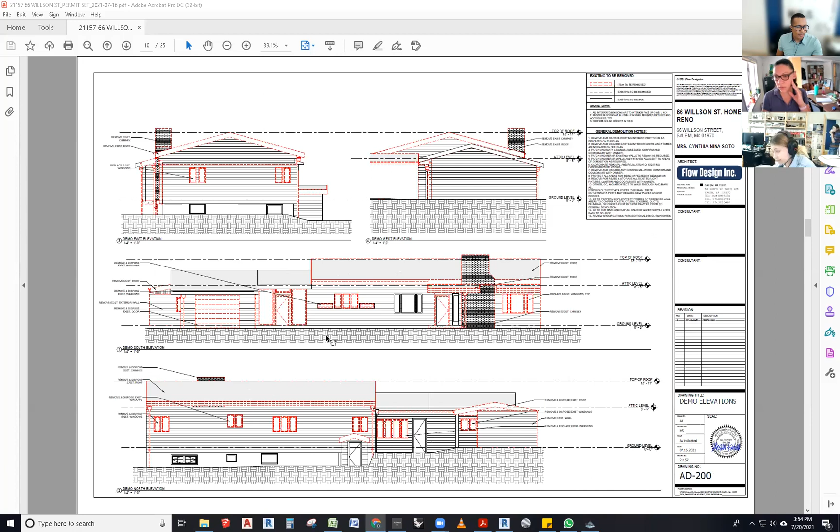All right. So the first thing I want to tell you is, when we try to frame this, we try to figure out a logical way of framing it. All of these options that they mentioned are great for different reasons and different scenarios. So let's start with the clear span I-joist.

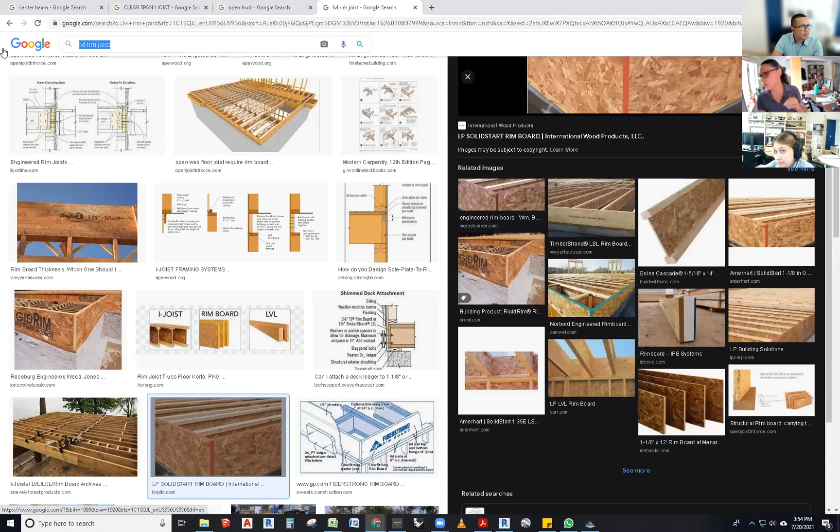So the I-joist, if you don't know what they look like, they look like an I, but like that, yes, in the middle. These ones are these pieces. Let me see what the best picture is. Oh, the one that says Boise Cascade. Is that not an I-joist?

Oh, okay, I-joist. So they are engineered members that can span all the way from one side of the building to the other side of the building. Most of the time, for residential purposes, they're perfect because there's no columns, there's no beams. So this would actually be your floor assembly, it will be made out of this.

Now, what's the thing? They tend to get very deep sometimes. I think they go from 9 and 7/8 to like 20 something inches, right? And it all depends on how far it goes. So they are becoming much more feasible nowadays because the cost of lumber is so crazy anyway. So people use it. You have a lot of space to put stuff inside the floors. For new construction, I would recommend it.

For a building that we're trying to add a floor to, it would limit your ceiling height a little bit, or maybe not. It wouldn't, but it would make the stair longer because you got to go up more, right? They're deep. Gotcha. Okay. So they're great for that.

The open truss, it's simply exactly what they say. What they said for the ceiling, it will be for the floor, for your second floor. For the open truss, it's a truss like this, a system of trusses. That will be your roof, and you buy them. I tell you what the sizes need to be, you buy them, and they come and they're done. They don't have to do a lot of cutting and messing with it.

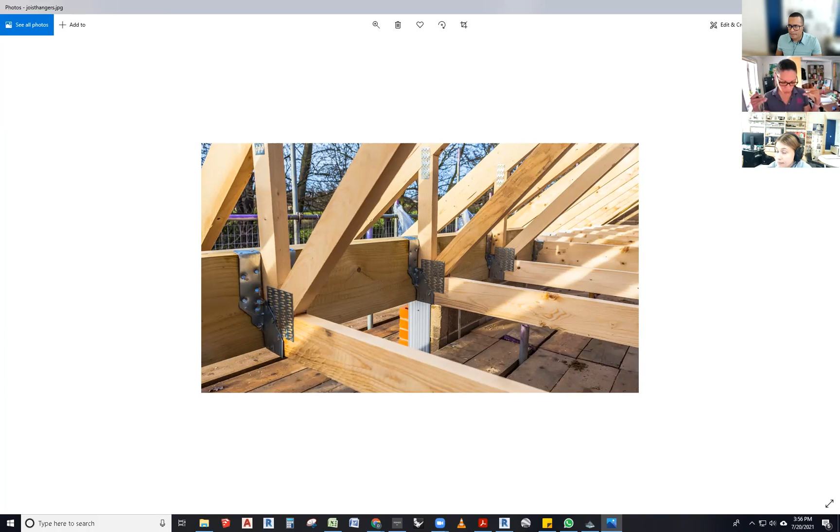Gotcha. So that open truss has nothing to do with the actual second floor, just with the roof line, correct? Exactly. Has only to do with the roof. Gotcha. And it's a member again. I tell him what the sizes are. They'll probably have to make it. And then that's it. With the span, you're done. You don't have to mess with anything. They don't have any beams. They don't have anything.

So going back to your building, so you know what I'm talking about on your property. So basically, this entire roof piece structurally will be one element, and you're done. Like that's it. So like this piece that you see with insulation here, by the way, which we actually just put insulation here.

But this is again, I don't want to... Yeah, no, that's fine. Yeah, no, I know you guys are still working on it.

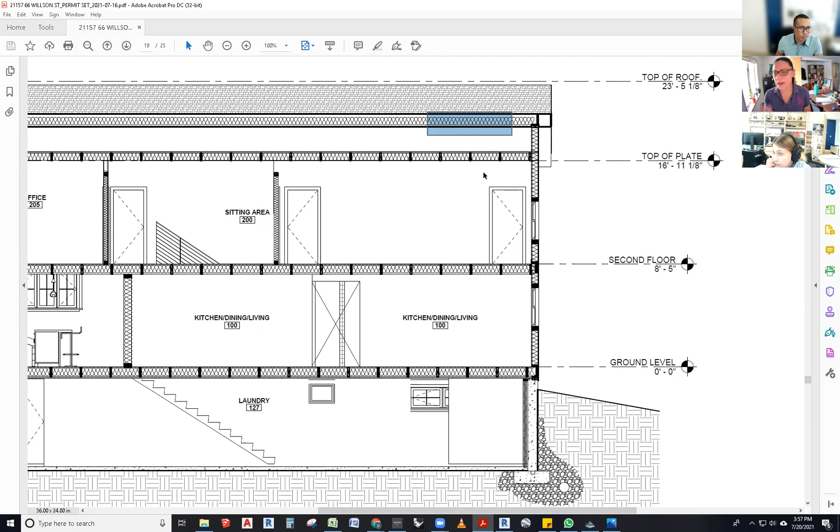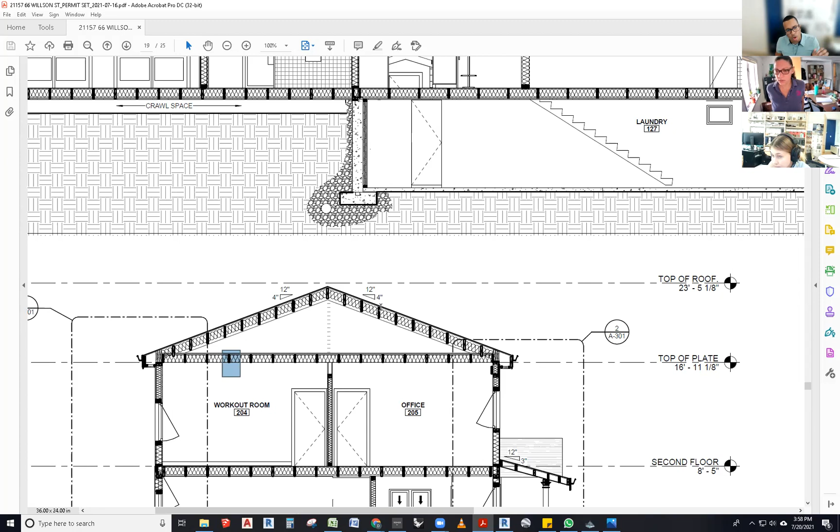Right, exactly. So this whole thing right here will come as one structure. Now, we have a 2x member that goes from here to there that will be sitting on some of these walls, and then another member. That's another 2x, different members at 16 inches on center, all through your entire ceiling. And so that's that thing.

The other option that they were talking about, it will be more feasible for this. It will be the I-joist that will go all the way from this side to this side and done. They don't need any columns. But isn't that going to limit my ceiling height on the second floor? It wouldn't necessarily limit your ceiling height, to be honest. It actually just increases your floor height, like the stairs, because we probably maintain the same ceiling height. We just go up with it.

So it means that your stair will have to go higher and it will have to be longer by whichever amount of depth we need. I can quickly try to tell you how deep they would need to be. I think the cost comparison, they get pricey. They are pricey. Maybe you don't do them at 16 inches on center, you might do it at 24 inches on center, so it will save you a member. But they cost more than a 2x8 or 2x10.

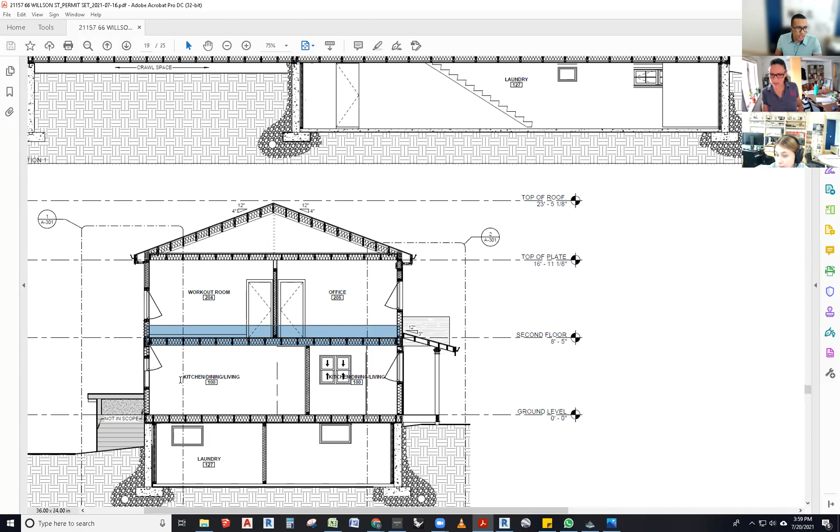So then the other thing that he mentioned was an LVL rim joist. What is that? So the LVL rim joist that he's talking about is like grabbing an LVL on the edge all around your entire building. Now I've never seen that term being used like that. So I'm assuming he means an LVL will be all around the perimeter of your building, and then you're going to attach your joists to them. I wouldn't do that. I don't know why you would want to do that.

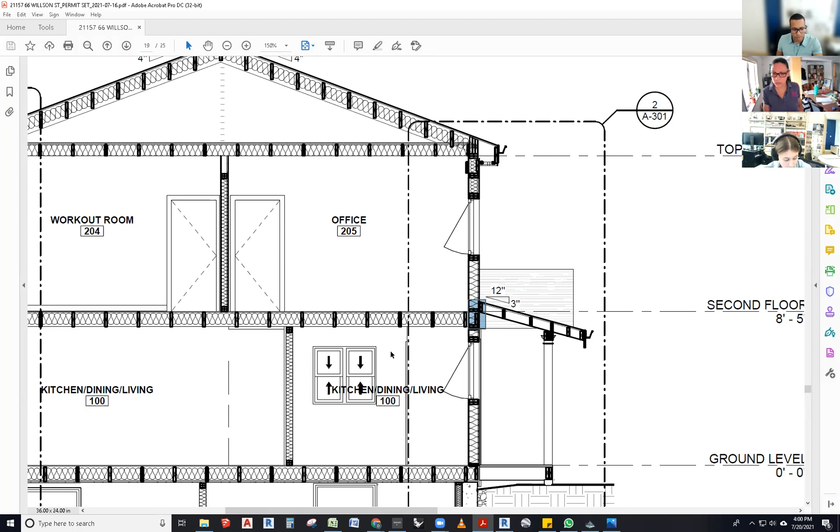You do that sometimes when you want to gain some height on your ceiling, but you still will have to do what we did. Like these members right here will still have to be supported by a beam somehow. So I don't know why you would do that. So we got the truss, the I-joist, and the LVL rim joist. Yeah, so that's what the rim joist is.

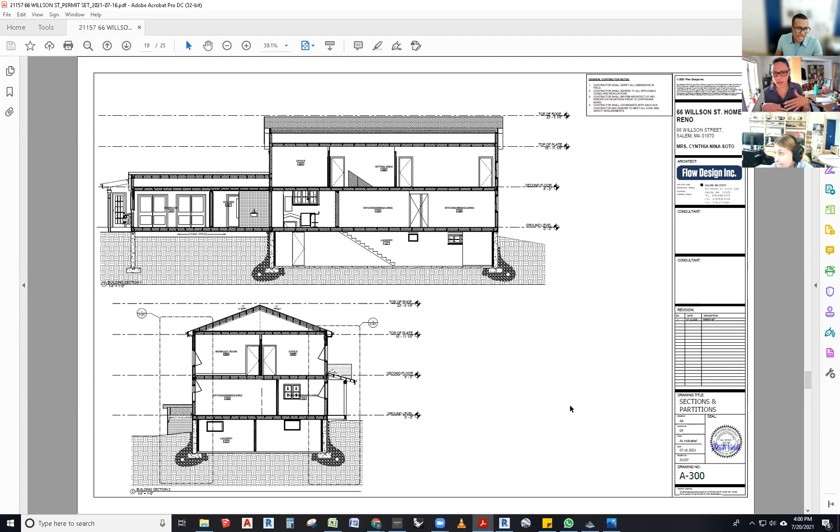The LVL will go all around the whole thing, but it's only to gain height, so the whole floor sits on top of that. But you still need joists to support the middle, or else it's just going to come in. Exactly. So that wouldn't save you anything. So then what is it that we are doing? We're doing a center beam, right?

Exactly. So we have a beam that will go through the middle, some posts that will go inside the walls, and hopefully they land within walls and locations where you wouldn't see them, and they still have to be supported by whatever structure you already have below. There may be some reinforcement that needs to be done to the columns that you already have, or new columns that need to be put.

Ideally, we just reinforce the ones that you have. I know you do want to get rid of some in the future, so we have to mitigate that part. But we're basically doing conventional framing for retrofitting a building. The I-joists, those are things that I considered early on.

Like, okay, we're building this new, and I have seen them done for that first floor over the basement. They're all I-joists, because all your mechanical goes right through it. They can actually cut holes through it, and it's great. Makes sense, yeah. But I-joists in the ceiling where you're going to pour concrete, so you can go lower. That's all good. So that's where I have seen them.

Okay, so my answer to your contractor is: just do whatever you tell him to do. Yeah, but he has wiggle room. He could quote it whichever way he wants, to be honest. Like what I did here, he could say, you know what, I'm gonna get a truss for the roof, are you guys okay with it? Well, would it save me anything on my roof framing? If it does, then yes, just remember I'm going to insulate the roof itself. Nothing changes in there.

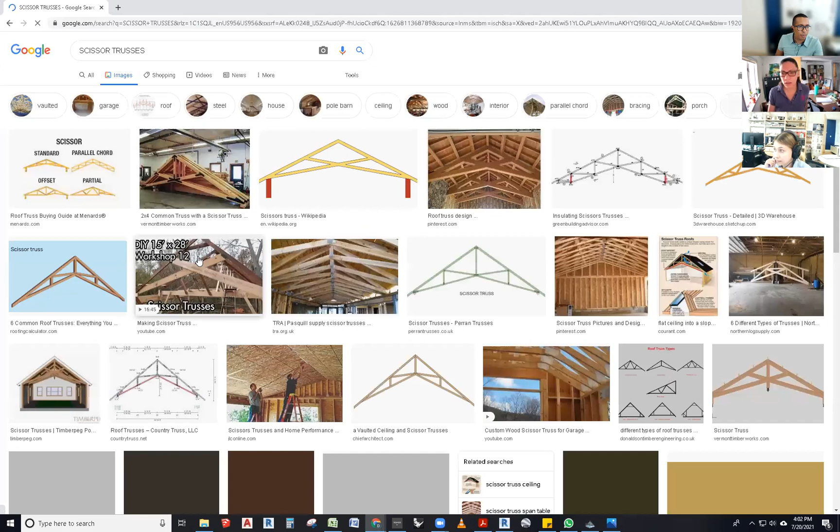Okay, sometimes the issue is also if you want to use that roof space for whatever. The truss he's saying is open, so it wouldn't have the zigzags that you see inside the truss, it's an open one. There are other ones called scissor trusses. Actually, this wouldn't be an open one, but this is a scissor truss, and it's good when people are doing cathedral ceilings. Yeah, no, we're not doing that. Okay, but you have conventional.

I also hate that you have your caps lock on. Only psychopaths do that. We draft in architecture with caps on. Really? Have you seen all of our drawings? You don't see lowercase at all. No, I see that, but that's a drawing. I'm like, that's just weird. I never knew that. I'm gonna make that a trivia question.

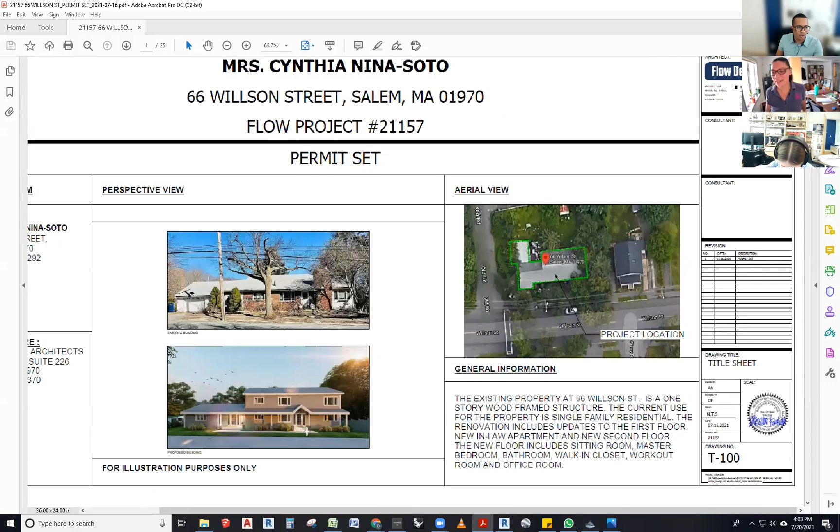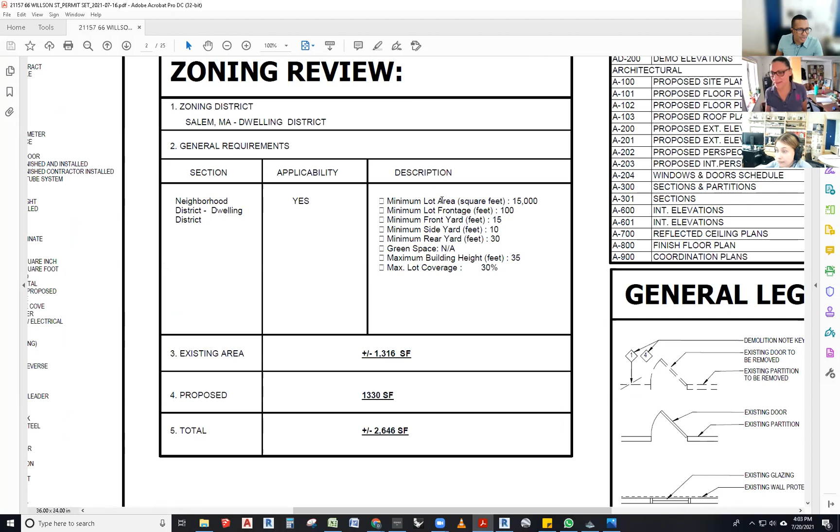Here you go. All caps for all architectural drawings. That's a must. You see it even on our cover page, boom. Because it is much more legible than regular writing, especially when they photocopy. In architectural school, that's the first class: hand lettering and hand drawing, all caps. You may see some things that aren't, but this is how they do it on the code, the building inspectors. So it should all be all caps.

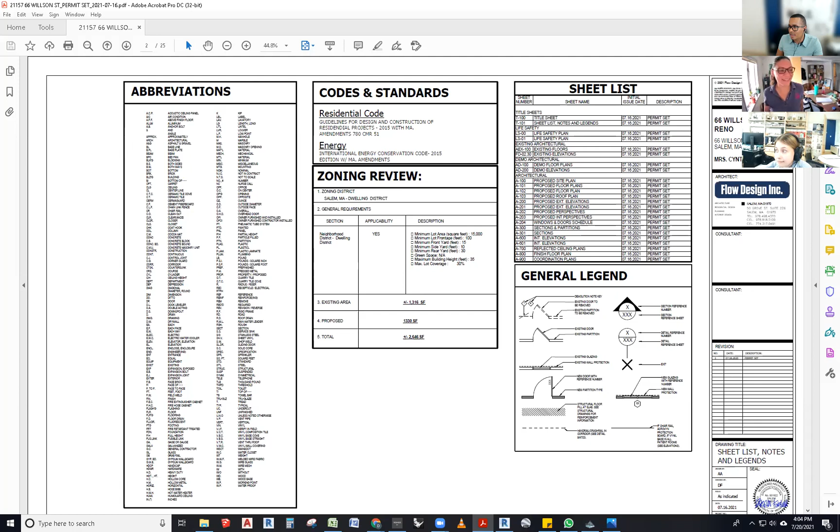Sometimes I send messages to people and I get in trouble because they think I'm yelling. I'm like, I'm sorry, I'm an architect. But there's quick buttons, Shift F3 changes it. So that's easy.

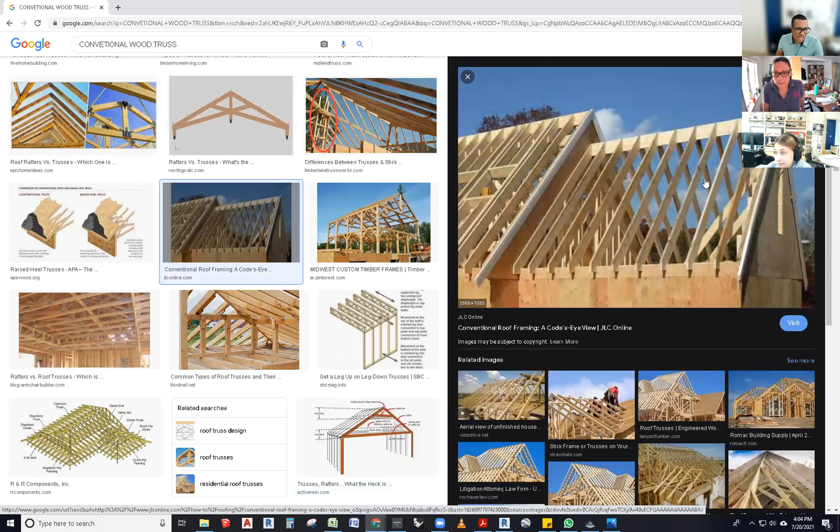So these are your truss options. I think the one that he's saying is like this, open. I guess it's almost like a collar tie. But he's saying it's one option, that's all. This is what we're doing for conventional framing right here. Gotcha. To me, I would think that is cheaper than doing a truss. Well, you've got to think less about cheap versus expensive.

There are only two ways that you save money. You either save money on labor or on the material. The thing is, labor is much more expensive than material all day long. So if this truss comes in, they don't have to be cutting this lumber piece by piece and attaching piece by piece. That's true. They actually teach us this in architecture school for the exams.

What would you suggest to your client in Alaska where there's a shortage of labor? They do all these crazy scenarios. There's not much labor, the weather is horrible, so they have a very small window of opportunity to build before they get a storm. Well, pre-manufactured: get it at a warehouse, ship it that same day, assemble it that same day, you're roofed that same day, done. I would recommend that one. But if it's in a locality where labor is abundant and cheap, have the guys have fun in the middle of July on the roof, sweating.

Done, right? Yeah, that's it. It's all good. They need it. So if he or whomever we end up hiring, once you stamp your permit set, would they then be able to say, oh, we're actually not gonna do this roof line, we're gonna do trusses? Like, how restrictive is that?

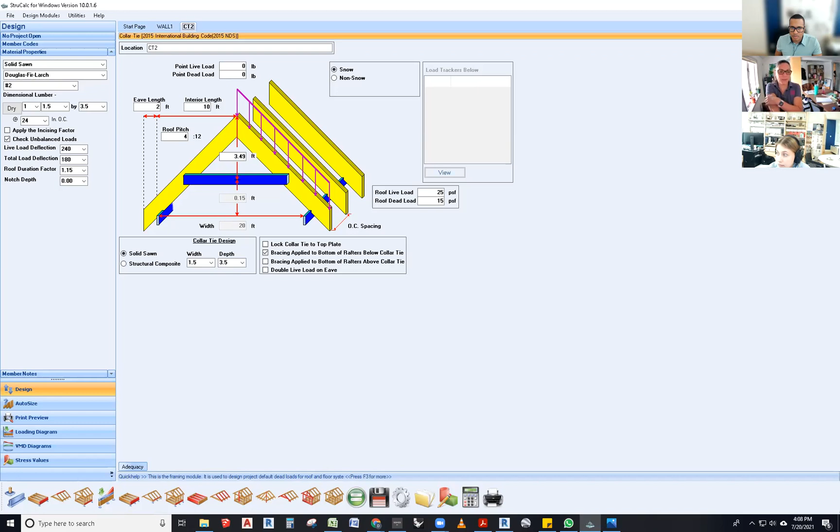Because at the end, I'm not even trying to protect the contract. I'm trying to protect you. I don't want this thing to fall. Correct. So I would check it out. It would be like a minute checking. All good. Right, it's the same thing as me writing an offer for a client: wait, let me just run my market analysis, let me make sure you're not overpaying. Two seconds. Good to go. Exactly. You go that little extra mile that doesn't cost a whole lot. I do this for every client.

Of course, your preferred client. Yeah, and she was learning at the same time. So it's mandatory learning for her right now too. So those are the things.

I must say, I am terribly sorry that you got me, because I am not only a realtor, but I'm also a flipper. So I am that 1% that takes a look at the plans and is like, I need to verify that measurement. Let me double check that. That is me. You're not gonna get very many clients like me. We've had three, actually four. I know them by names, last names, and addresses. It's not to be difficult. That's just the world that I'm in, right?

Because I've done so many flips, I know to look at and ask certain questions that a regular consumer typically would not ask, right? But at the same time, a regular consumer would take the plans and be like, yes, let's put a window there.

Meanwhile, I'm looking at the map, at the plans, and I'm like, wait, that seems like a supporting beam right there. We can't cut into that. You know what I mean? Like, so don't get scared.

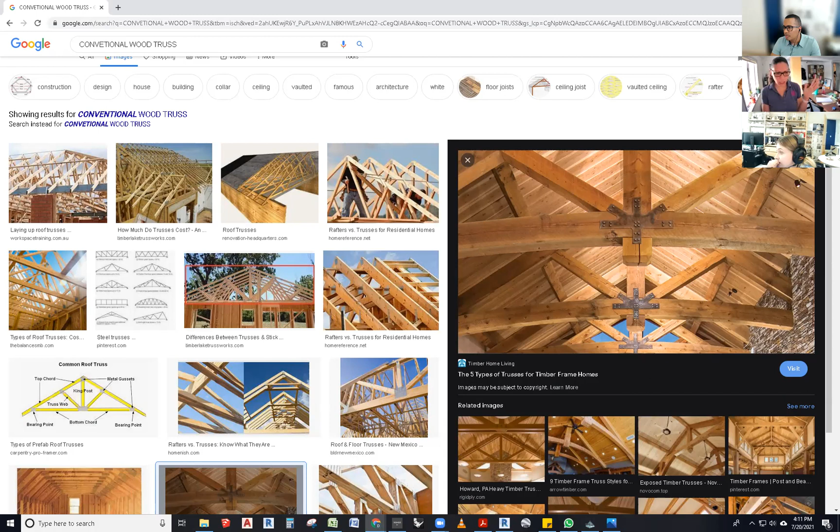The other question that just popped in my head. We're building a second floor. Do I need a structural engineer? No, we're doing it. So our drawings right here, this is exactly what we're doing. We're engineering what you need to do to make this thing work. So all of these members, like we're calling 2x12s, we're calling

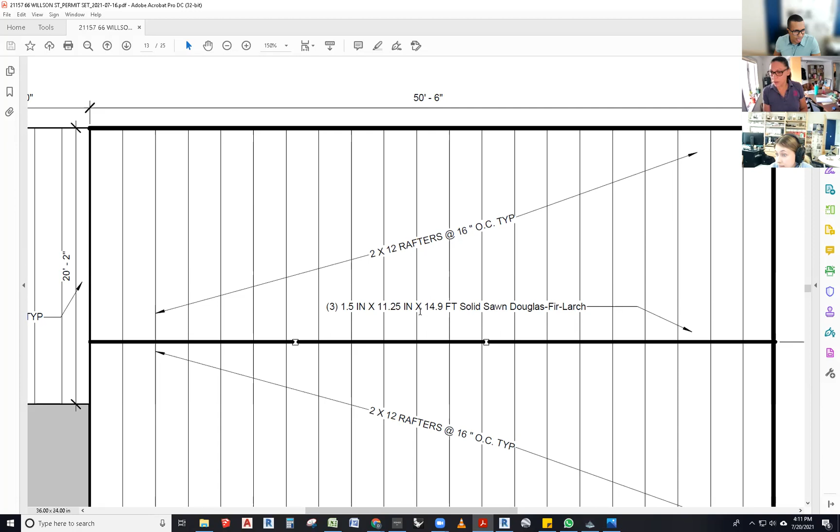LVL, this LVL right here. Actually, that calls for a solid one. But whatever that member is, we're sizing all of those members so that it doesn't fall structurally. That's what I assumed, but I'm sure Darwin or Igel would have told me, hey, go hire a structural engineer. So I was like, wait, I don't need to worry about that. Exactly. So we're handling all of that stuff. If there's something I'm not comfortable with, I would immediately say, hey, we need somebody else. This is above my pay grade. But absolutely.

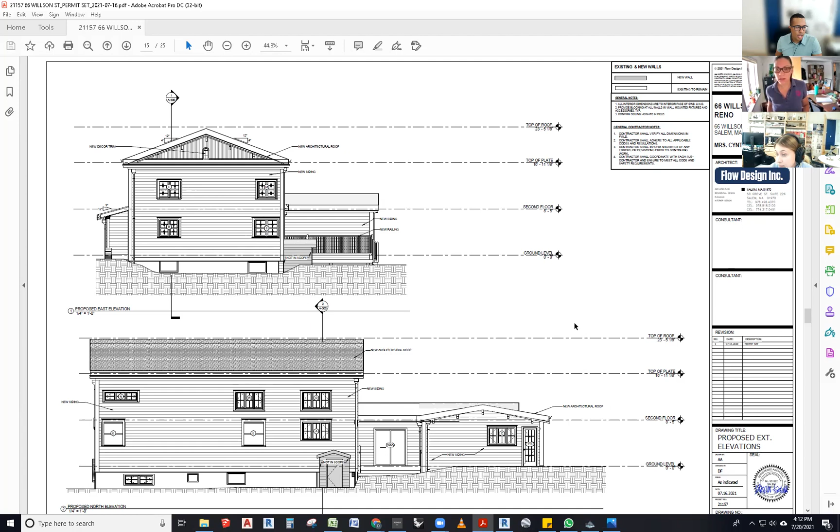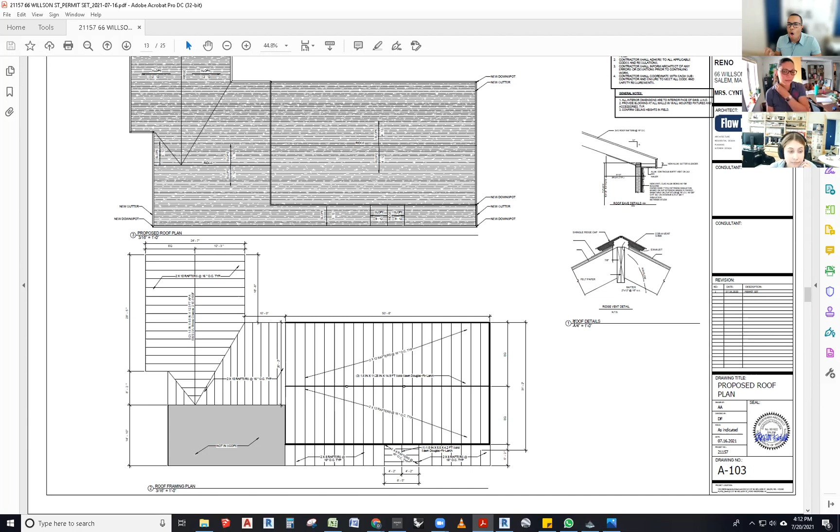There were a lot of other people involved in this project, which by the way got me thinking, can we add another floor to this building? You probably can. Future thinking. I was talking to somebody about your project. That building is actually super engineered. I saw those steel beams they have, the brick in there. It's pretty heavy, pretty strong. On that one, I would not want to stamp that. I would want a structural engineer to tell me, yeah, this can structurally support another floor above. Yep. I would expect that, we would be adding a whole other floor, not that we are, it's just when there's no flips to do, you start looking at what you can do.

But these things, single family residential, I do it all day long. Everybody here at Flow does it all day long, no problem whatsoever. So far we haven't had any casualties. I don't think we will have any issues. With adding one floor, I'm good. Adding two floors, then I don't know. And we've even done 3 floors. I have a property in PVD. We're doing 3 floors, and it's been good so far. I hope this answers all of your questions.